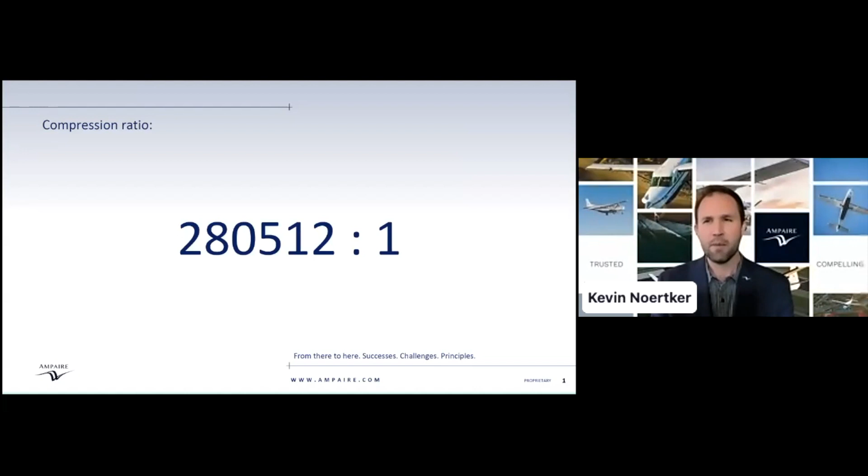What I hope to share today is a bit of that history, some of the stories, some of the lessons learned, as well as the principles that have guided us from where we began to where we are today, and certainly which I plan on driving us as we head off over the horizon into the future together. But before jumping in, I'd love to start with a video. As we saw, that compression ratio of 280,512 to 1 — this is just one moment experienced within the Ampaire team across those 8 years, which I'd love to share with you here. So if we could get the video started, thanks.

We're here at the Camarillo Airport witnessing our first hybrid electric flight on Ampaire's Eco Caravan. It's our first commercial intent product, slated for certification in 2024. The Eco Caravan is the first commercial application of this operating system for electric aviation that Ampaire is building, one that we intend to take into larger planes with higher capacity, longer range and endurance and payload. A very exciting future, the foundation of which we're beginning today. A significant fuel reduction, 50 to 70% in terms of fuel and maintenance combined. That is transformational for any airline, for any operation.

Clear to 1, Camarillo Tower, runway 26, cleared for takeoff. 1, clear for takeoff, runway 26 left.

Number 2, following traffic, short final, runway 26, clear to land. Clear to land, runway.

A hybrid electric aircraft is actually going to be able to fly people and cargo. Just landed, had a successful first flight. Yeah, the team's worked so hard, and this is such a magical day for all of us.

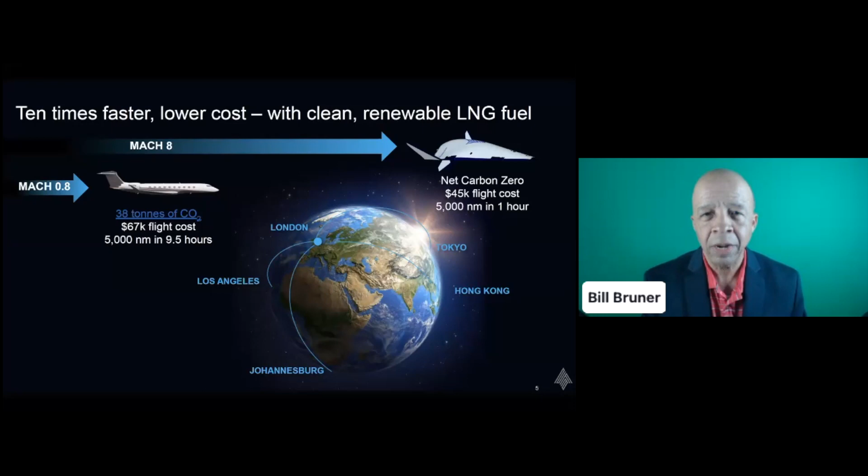3D printed aircraft production costs will be similarly low, and our fuel costs, even when renewably sourced, will be pennies on the dollar compared to fossil Jet A. All this combines to create a product that's 10 times faster at the same or lower operating costs than today.

We've raised $200,000 from our friends at Kepler Space Ventures and a couple of angels. We've won $2.5 million in awards from DoD and NASA to build the engine. We've executed a $25,000 contract with Lockheed Martin Space Systems to validate our 3D printed aircraft concept, and we've received $133,000 in non-dilutive grants from the New York State Energy R&D Authority through the Venture for Climate Tech Accelerator. Plus, we have letters of intent from companies that wish to use our aircraft for their missions and others who want to buy our engine. So we're moving.

So I'm the CEO. I was a presidentially appointed senior manager at NASA, fellow in the Office of the Speaker of the U.S. House of Representatives. I went to the Air Force's Top Gun School, the Fighter Weapons School, was a supersonic aviator for the Air Force. So I can't wait to go faster than supersonic to hypersonics.

David Gregory's our COO. He printed the first 3D printed regeneratively cooled rocket engine. He developed America's first oxidizer-rich stage combustion engine. He was the lead propulsion engineer on the BE-3 rocket engine that launches people into space on the New Shepard vertical takeoff and vertical landing rocket. So he has the distinction of building the engine that was the first ever to launch people on a VTOL rocket vehicle, so eminently qualified.

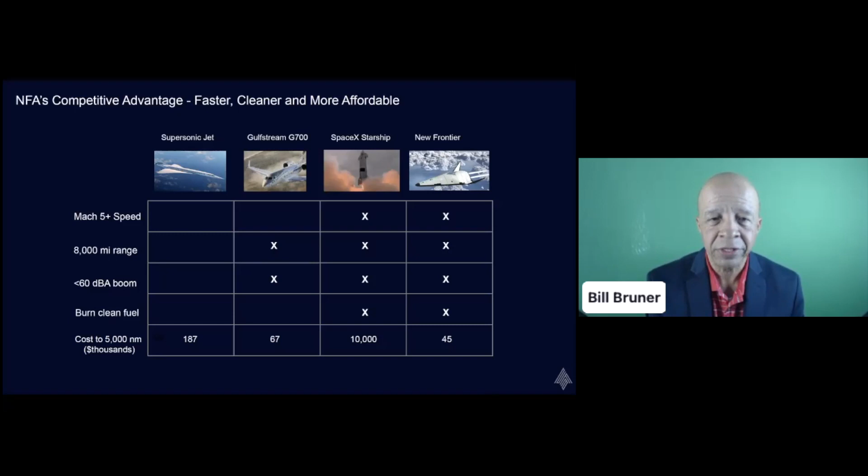So we're bragging on ourselves. SpaceX can go as fast. They use methane fuel, and they could make it renewable just like us. However, that vehicle is going to cost more than we cost to fly. It's the size of a skyscraper, and it's going to require a lot of infrastructure at both ends to do the point-to-point mission.

So how do you make money? You print vehicles and you sell them for more than it costs you to make them. A Gulfstream costs $100 million at that price, with a $50 million per airplane cost of goods sold. That's a 50% margin.

The charter airplane market, this bizjet market, is about $60 billion, and we see ourselves at $1 billion in revenue 9 years after our first flight. That's enabled by low production costs and 3D printing. And we see that this is going to be huge, and that doesn't include military.

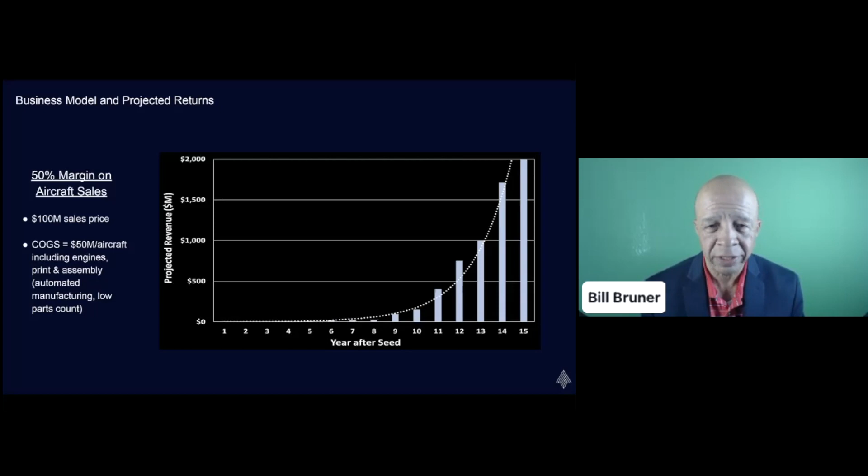That's simply commercial jet sales. So our go-to-market plan is to start selling the engine now as a product to NASA and small space companies. We are also currently selling the first version of the aircraft, the Pathfinder, into the DoD sales channel, where we have an extensive Rolodex. We've begun customer discovery conversations with large air express cargo companies and charter operators, and we have an LOI from a major hospital system to carry medical logistics when the aircraft is ready.

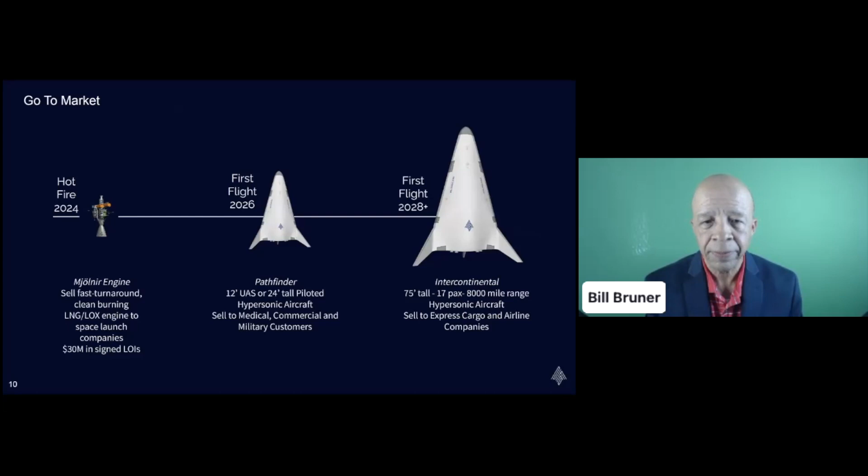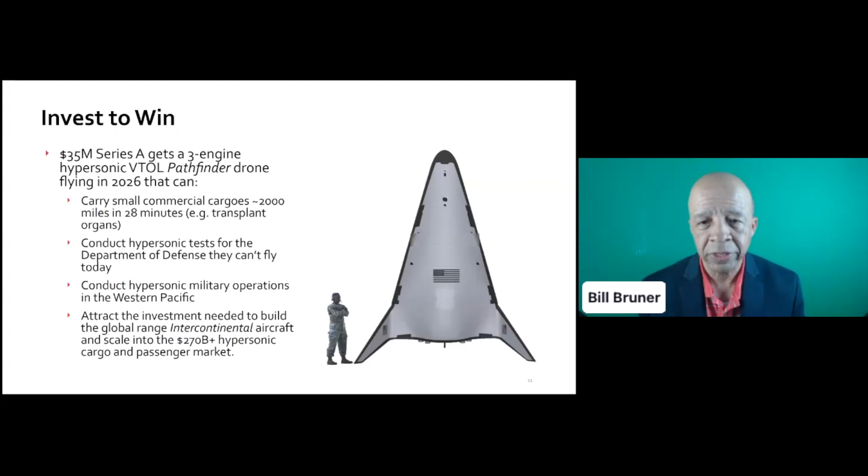So last slide, this is our call to action: invest to win. $5 million to get the engine tested and ready for sale as a product. A further $30 million to print the 3-engine version of the airplane. That gets us to hypersonic VTOL flight and MVP. This airplane would not just be a proof of concept, it would be a revenue earner, flying cargo for military and civilian customers, conducting affordable routine hypersonic tests that our country hasn't been able to do since the X-15 flew in the 50s and 60s.

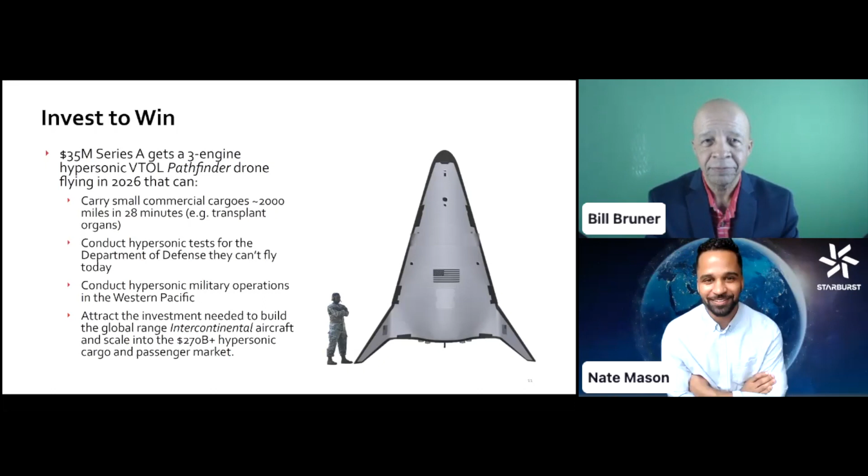Avol Aerospace focuses on same-day drone delivery of bulky items. Led by Nate Poon, Avol builds novel, dual-use autonomous electric drones enabling delivery to hard-to-access rural areas. Their solution has use cases in logistics, aerospace, medical, deep tech, and climate domains.

Hey everyone, my name is Nate. I'm one of the founders of Avol. Our goal is to enable faster, more affordable flights anywhere in the world using autonomous electric aircraft.

Before I get started, a brief snapshot on who we are. We have 9 pilots with different hospitals across the US to deliver medical supplies. We're 2 PhDs out of Berkeley and Cambridge. Both of us have started at least 3 companies and exited at least one of them. The aircraft that we're building has significantly lower manufacturing costs, and we make about 72% gross margin for every delivery we make. We raised just under $750,000 last year from investors, plus a series of government grants with the DOE and the DoD.

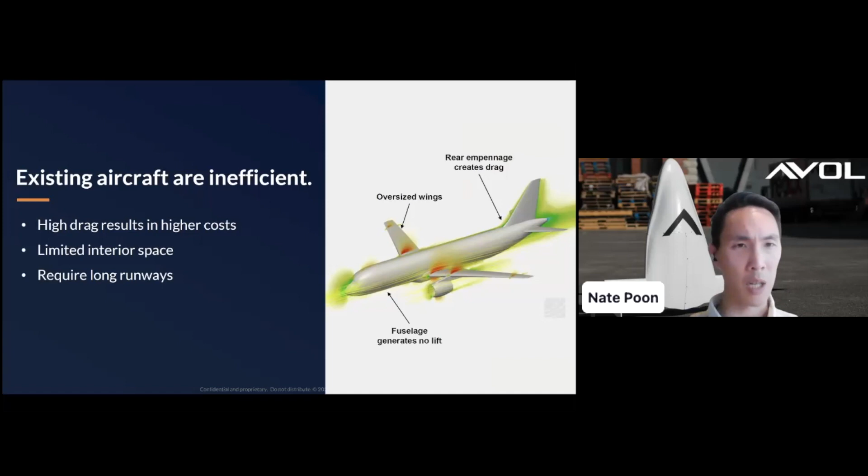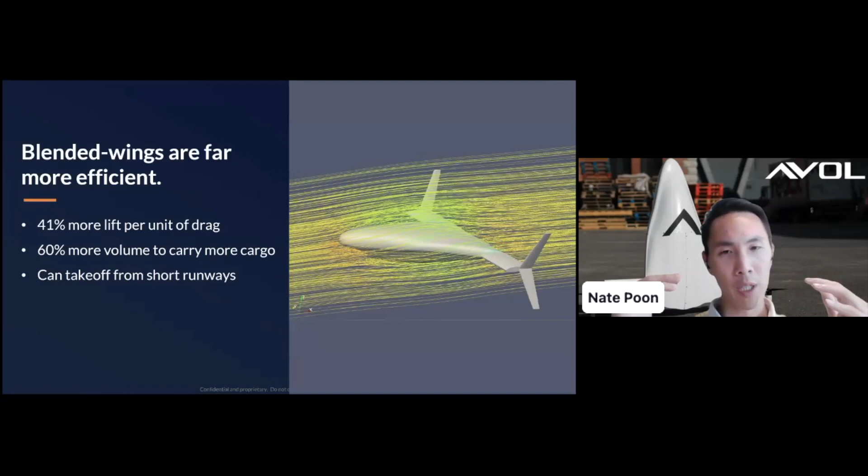So one way to make a much more efficient aircraft is to do something called a blended wing. Blended wings are significantly more efficient. Instead of being a tube with a couple of wings on it, these aircraft, the entire aircraft is a wing. So you get much more lift per unit of drag, which means you're more aerodynamically efficient, you have more range. We have more cargo volume capacity to carry more cargo, which improves the unit economics of whatever you're carrying in the cargo bay. And then because the aircraft is so efficient at generating lift, you can operate from very short runways.

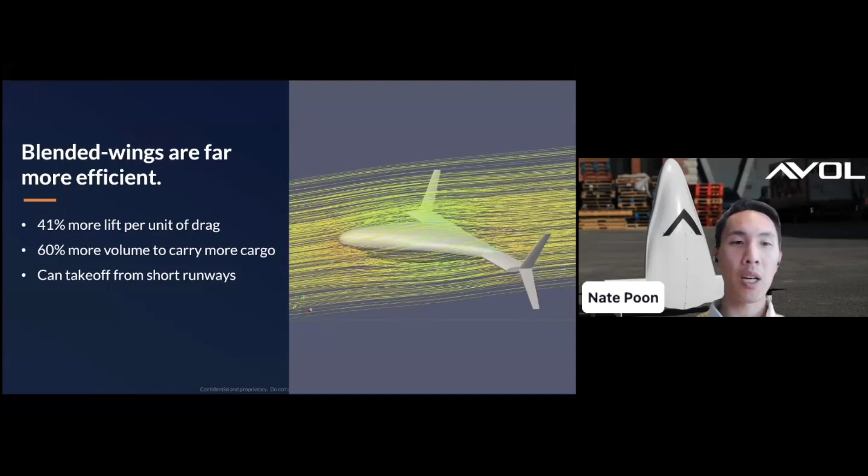So there's been a couple of attempts to do this, but the challenge is extremely large aircraft like this are extremely difficult to build. To give you an example, Natilus, JetZero are also building very similar blended wing aircraft at a much larger scale. They've taken 8 years, 6 years to do this, and still no real large scale prototypes. So these types of aircraft are very difficult to build.

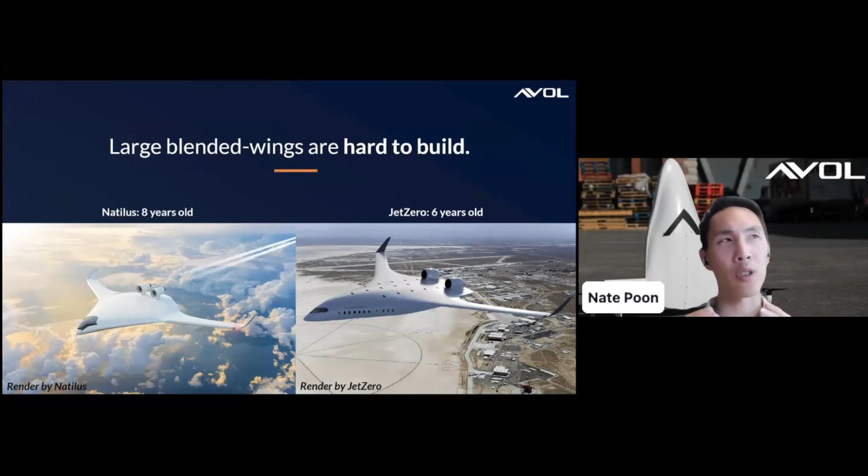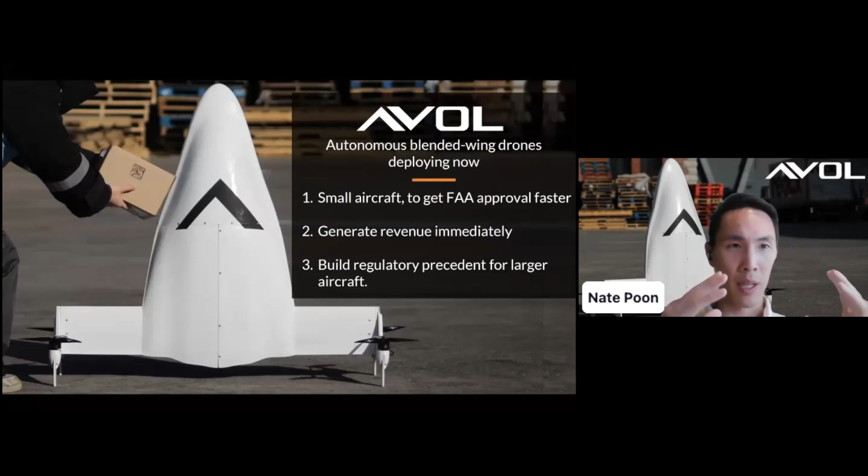And so the thesis behind Avol is to build small, autonomous blended wing drones that can deploy immediately. When you build small blended wing aircraft, you can get FAA approval faster. You can start generating revenue immediately within a standard VC timeline of about 5 to 6 years. We could get you about $100 million in revenue. And you can build a regulatory precedent for building larger aircraft based on that airframe. So that's the general thesis behind why we started Avol.

So the problem we dialed in on was delivering things between hospitals. Right now, medical deliveries between hospitals are extremely slow. About 1/3 of transplantable kidneys are lost because transit between hospitals just takes too long. Each kidney has a value of about $2.5 million. So at about 12,000 kidneys every year, that's about a $30 billion problem just because we haven't figured out how to deliver kidneys between hospitals quickly.

You can extrapolate that to anything that enters and leaves a hospital - blood, organs, biopsies, vaccines, pharmaceuticals, which comprise about 44 million deliveries every year. So we believe that this is a pretty compelling problem that small lightweight drones are particularly useful for solving.

The challenge hospitals face is that their only options right now are medical couriers. Medical couriers are ground-based drivers. They take about 4 hours to arrive to pick up your payload, and then they transit for about 2 to 4 hours, which means that it takes roughly about 8 hours for a medical courier to complete what should be about a 2-hour drive.

So at this point, a lot of people go, well, we could just use drones, right? The challenge is that existing drones typically start with an airframe and then try to adapt that to a hospital. And I spent 10 years doing hospital logistics. This approach doesn't work because hospitals are some of the most risk-averse, custom-tailored customers that exist on the planet. And we see this in stalled efforts with drone companies engaging with hospitals.

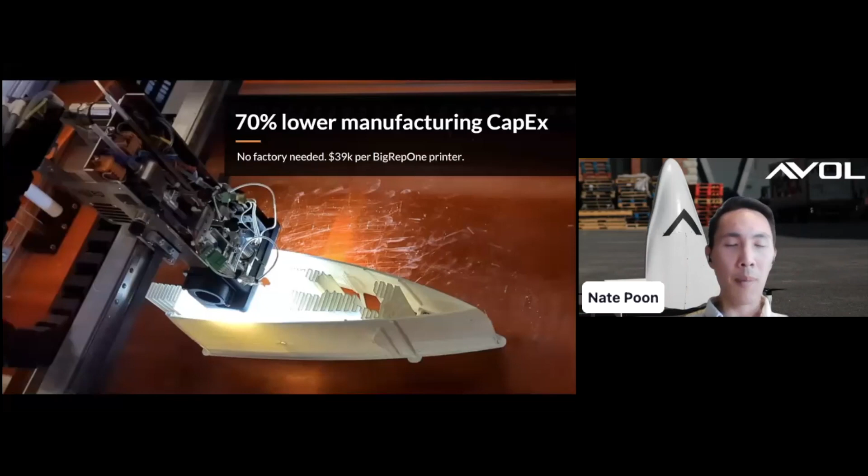The aircraft is 3D printed, which means that to scale up production, we don't need a factory. We can get a small warehouse, put a couple of 3D printers in there, and be printing roughly between 150 to 200 aircraft per year.

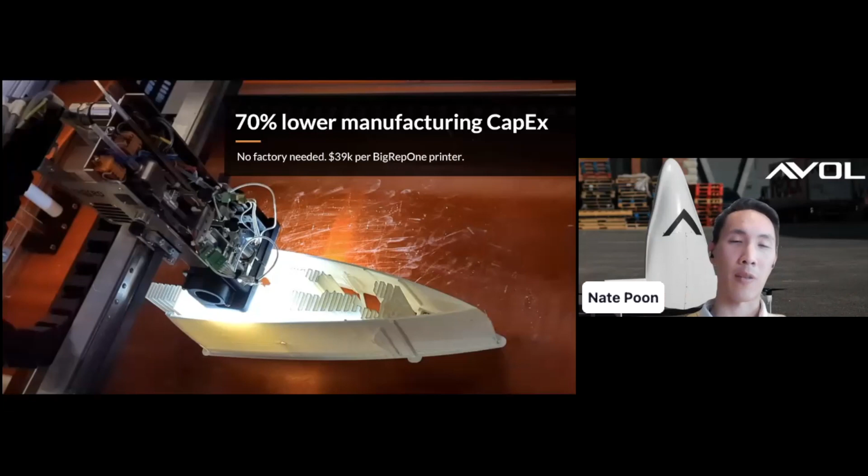What makes the unit economics work here is that we own the entire delivery process. We actually have human drivers pick up and deliver the kidneys, and the drone flight occurs in the middle of that. The driver picks it up, we have a drone flight, and then the driver delivers it on the other side. We do take a hit on the margins, but we're still able to generate about a 72% margin per delivery, while being able to target 3 to 4 times more customers than drone companies trying to fly in urban areas.

Regulation to fly over urban areas is not very well developed. By using drivers, we're able to take the kidneys and blood out of the urban area and fly from a more rural area, which opens up our market by a factor of 3 to 4.

It also gives us a unique go-to-market strategy, where we can enter a new city and just use drivers to deliver blood and kidneys initially, then bring in the drones as we achieve regulatory approval. Using this approach, we can enter a new city about 12 times faster than a drone company because we don't have to get FAA approval. This lets us scale across the United States, build a network of customers that love and use us, and then bring in the drones to increase our margins by up to 70% for our initial go-to-market strategy.

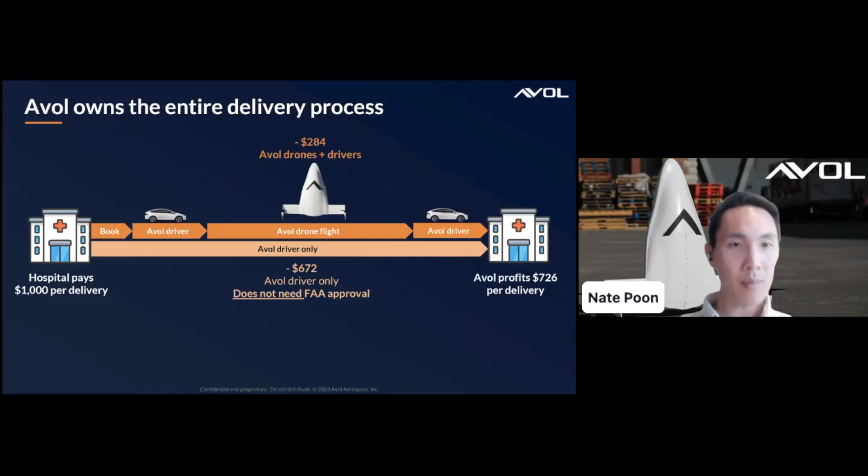The aircraft we operate is small. Typically it might take 5 to 7 years to get type and production certification with a larger aircraft. Because we have a small blended wing aircraft, we can take advantage of the Part 107 waiver, which gets us to mainstream operation in about 3 years. The caveat is we have to stay under 55 pounds, fly lower than 400 feet, and fly over empty areas. This is the use case we've optimized the aircraft for hospitals, and it resonates extremely strongly, especially with hospitals in rural areas.

Our model is straightforward: we charge a delivery fee for every delivery. There are about 44 million medical deliveries that occur annually. We can charge anywhere between $500 to $1,500 per delivery, resulting in roughly $2.3 billion in revenue if we penetrate 10% of the market. That 10% figure is driven by what one of our competitors, Airspace, currently achieves, with 1 in 10 hospitals using Airspace. We believe we could achieve about the same volume.

In about 5 to 6 years, our trajectory is about $100 million in revenue after we raise this current round.

Ultimately, the goal here is to use Avol to deliver anything, anywhere. Whether it's a small package or a large package, different aircraft have different niches, as Kevin was alluding to earlier. Our goal is to build a fleet of blended wing aircraft that caters to every niche of this market. We estimate the global air transport market is about $700 billion, and we think we could probably capture maybe 20% of that by building larger aircraft based on our blended wings. However, we're going to start with hospitals because I've spent a lot of time selling into this market, and we can generate revenue very quickly with small, easy-to-certify aircraft.

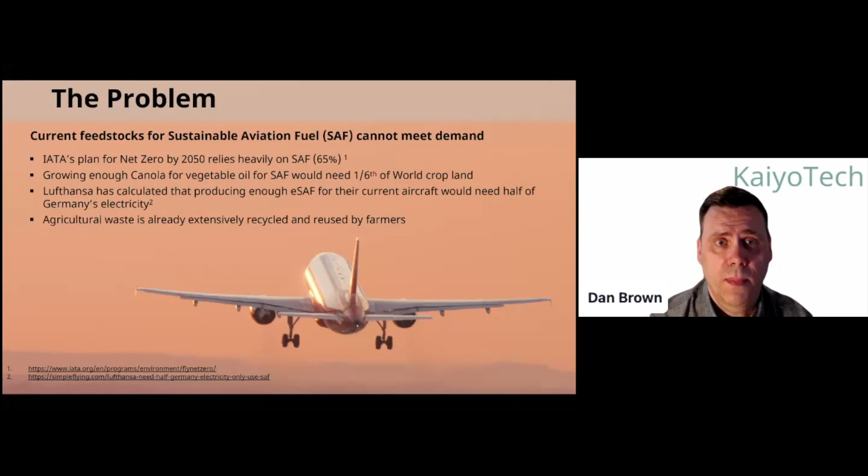The solution we're looking at implementing is algae, marine algae, growing them in the sea, which is their natural environment. So we're not using any land, we're not using any farmland, we're not using any fresh water, not using anyone else's electricity. It's just a different way of looking at the problem.

We know that in the past there's been a lot of experience and a lot of money spent on biofuels from algae. In the last decade, that was all genetic engineering, where we were genetically engineering marine algae to grow in a pond on land. What we're doing is mechanical engineering to engineer an environment in the sea which best suits algae. Next slide, please.

Just as a point, the reason for algae is the productivity. You can get more biofuel out of an acre of algae each week than you do out of an acre of canola oil in a year. And we will do that week in, week out, so we don't make all of our fuel in 2 months and then have to store it for the rest of the year as we use it.

The concept is to have enclosures under the water where we keep our algae under sunlight in natural seawater. Then we have a circular system by which we grow the algae, process them to take out all the hydrocarbons and carbohydrates that we can use to make ethanol. Everything else, the byproducts, which normally would be counted as waste, are our nutrients. They contain all the nitrogen and phosphorus we need to grow the next generation.

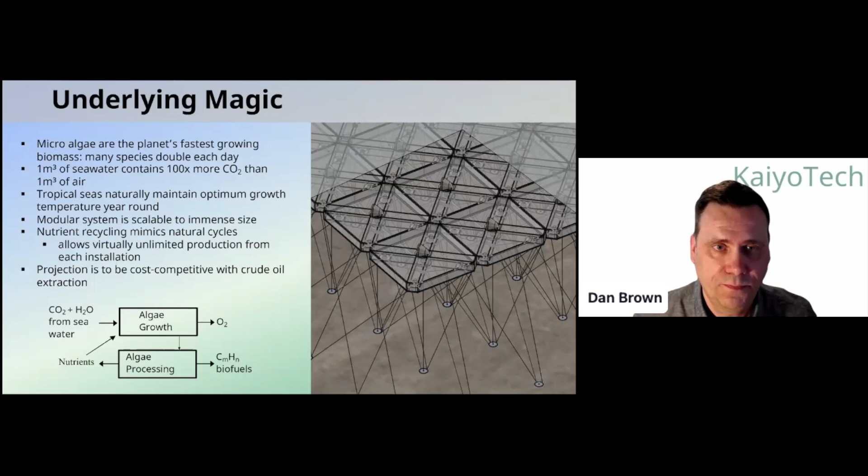The competitive advantage we're looking to do is we're first in the industry. No one else is really doing this. There are lots of people trying to grow algae on the land, and lots of people trying to grow large seaweed in the sea, one or two that, but no one's really doing what we're doing. So we're going to be there first. We've already got the patents lined up to make this work. And through what we're doing, we will find the best strains of algae, which we can then safeguard. And as we're going to be ahead of the curve, first in there, we will be ahead of the curve.

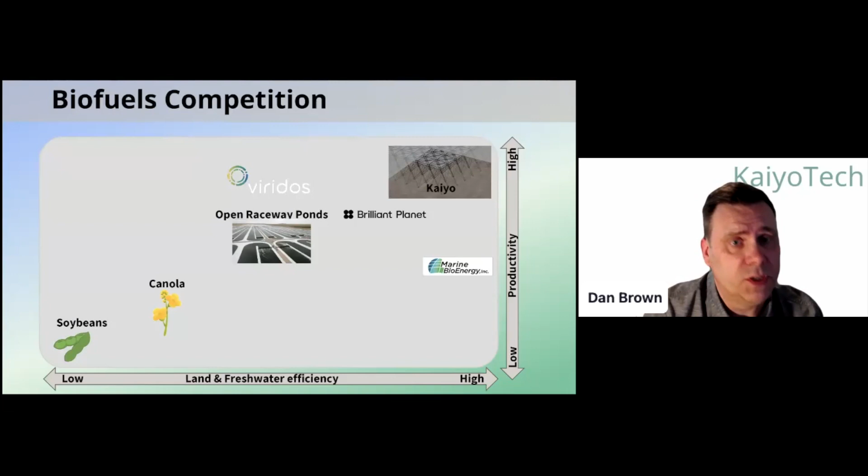So I've said a little bit already about how we compare. Microalgae are grown much, much faster than anything else, including any land-based crop. The problem with most of the approaches being taken is they use open raceway ponds, which still take up quite a lot of land and still need a lot of water. Our idea is to get rid of those major impediments, and also grow algae where Mother Nature has tuned them for hundreds of millions of years to grow in their ideal conditions. So we're meeting Mother Nature halfway, and we'll be more productive, with less competition and fewer resources required as a result.

The team at the moment is basically me. My experience is I've led teams of engineers in the aerospace industry, over 100 engineers, and I need to grow that team, and that's one of the things I'm looking to get funding to help me do.

Our go-to-market strategy: because we are producing basically raw bioproducts, one of the first major markets is actually not aviation or anything else, it's vegetable oil. In the same way that one of the main ways of making SAF is taking used vegetable oil and converting it into SAF, what we're effectively making is vegetable oil, which retails at more than two or three times as much per gallon as crude oil does. So that's where we would start. And as we learn to do this better and better, as our costs come down, we can grow into sustainable aviation fuel, and then ultimately, when we get the costs really down, it completely opens up to be a direct replacement for crude oil.

We still need to prove out the concept to people, so we're looking to spend as little money as possible with a three-phase stage to get to where we ultimately have rig one operating in the sea, generating about $8 million in revenue, covering its costs, and showing the world that the technology works and setting up partnerships with us. What we're doing now is lab testing, CAD work, engineering work, moving into field testing. Once we've reached our milestones for the first stage, and then on into getting rig one, that's around a total of 20 million investment for all of that.

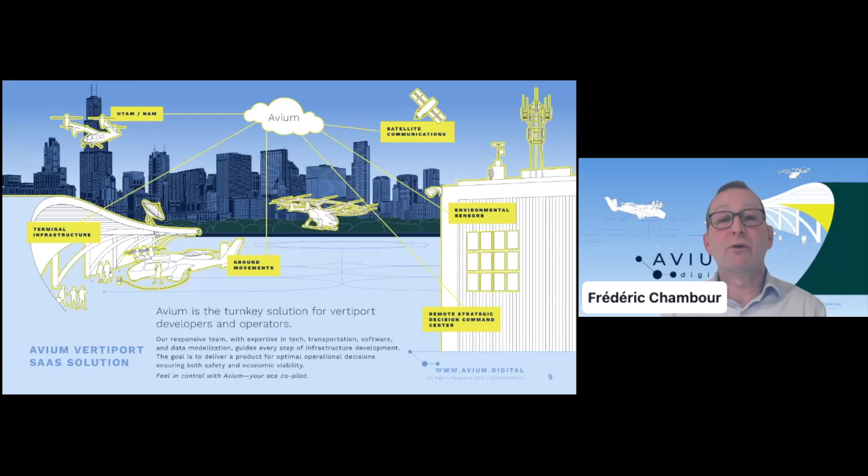Next slide. VTOL aircraft operators pay for their assets and infrastructure usage at vertiports. The vertiport owner pays a license fee to us for the use of our services. The license has a cap on the total annual number of flights so that we can benefit from growth, and the overage is paid on a pay-per-flight model. Avium services are value-based pricing. We aim at shifting the customer from seeing software as it is today for airports - a cost burden - to seeing our technology as an investment that contributes to their success.

Next slide. So we have analyzed the market beyond social media noise and marketing activities, and we anticipate that in Q4 2024, the Middle East region, mainly Dubai and Riyadh, will have the first vertiport operation, followed immediately by the United States in Q1 2025.

This will be followed closely by major European cities, just a couple. We also believe that the adoption rate will be significantly faster in the North American continent than in Europe, particularly the expansion across smaller cities.

For over a year, we've been exchanging with our future customers. Our current software version reflects those discussions and regular iterations with them, our team of experts, and our advisors.

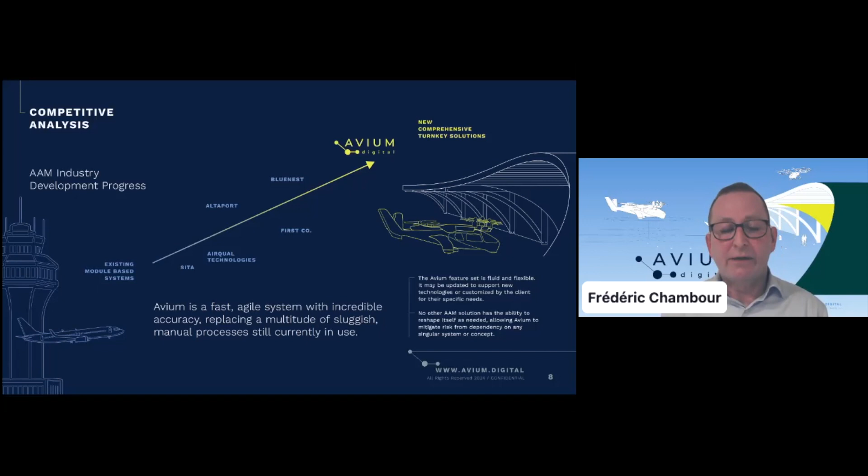As you can probably hear by my accent, our team speaks English, French, and German, and we have international experience in air transportation, operations, and management at CEO and COO levels. Matt has extensive experience in sustainable finance, and through our universities we have access to great connections and great research. Next slide.

Our financial projection: KPMG says that by 2030 the industry will be valued at 30 billion. They're not the highest, not the smallest, among the five big firms that made those projections. Early stage revenue for us will come from a conservative 10% out of those 30 billion, integrating third-party aircraft and infrastructure, and slowly when we start in 2025 we'll see the first license revenue kicking in.

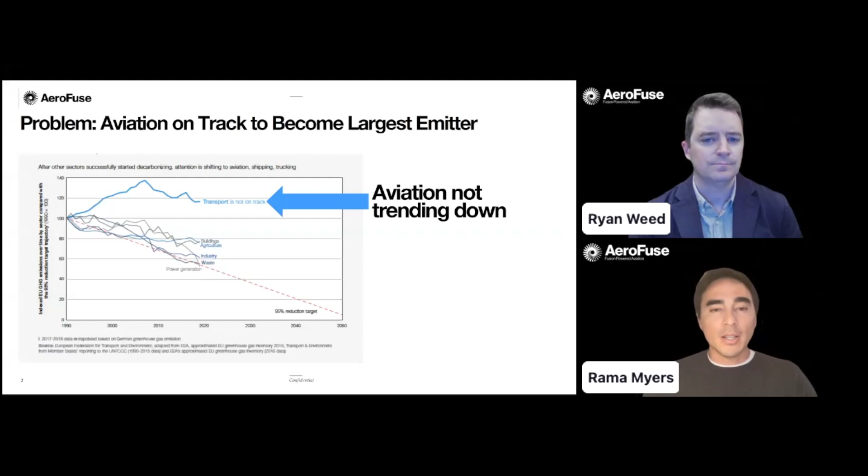A number of solutions are being developed. We've all heard of battery electric aircraft and hybrid aircraft like Ampaire. A number of folks are focusing on hydrogen propulsion via fuel cell or combustion.

But if we look at where emissions are coming from, it's medium haul and long haul aviation, which combined represent almost 75% of emissions. What's alarming is that if we look at the solutions available to us in that space through to 2050, we don't really have any other option other than SAF, or sustainable aviation fuels.

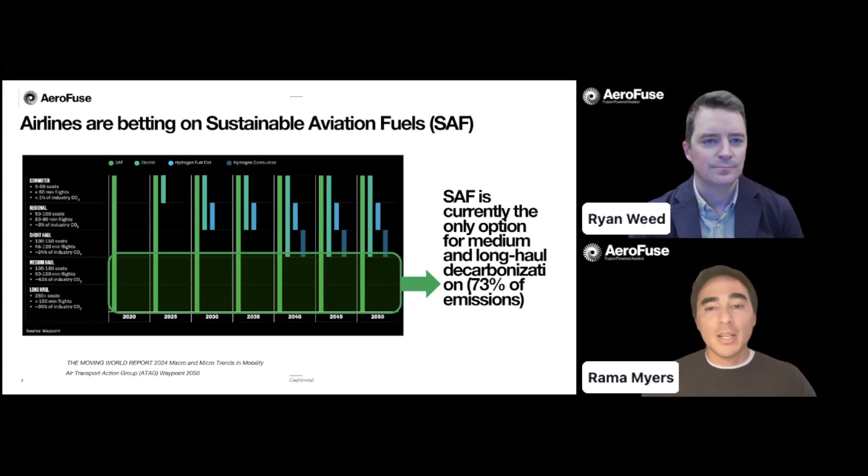SAF and all these solutions are going to be critical to the decarbonization effort, but the major issue with SAF is cost. Today, it's 2 to 8 times the price of jet fuel, and even out to 2050, it's forecasted to remain at 2 to 4 times the price of jet fuel. If we consider that airlines operate on very thin margins and that fuel represents up to a third of their operating costs, it's inevitable that increasing SAF adoption will lead to significant price increases for tickets.

In aggregate, this is a $4 to $5 trillion problem. This green premium will cost the industry about a decade of revenues, or put another way, it's $175 billion spent each and every year through to 2050 to absorb that green premium.

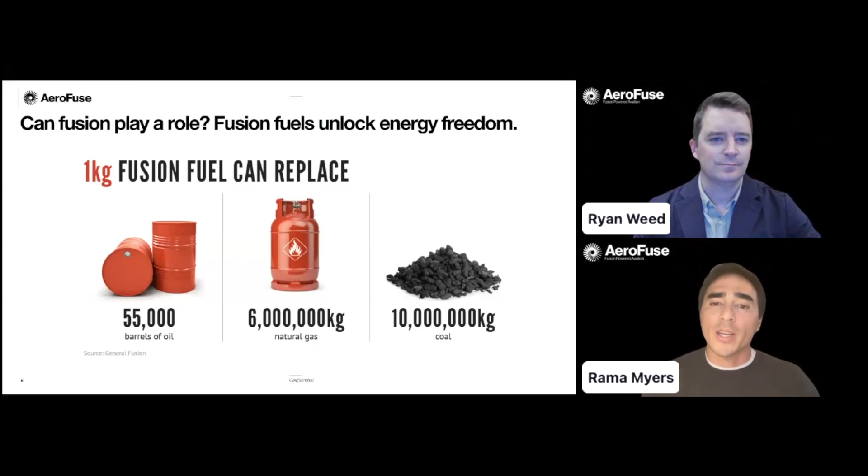This is why AeroFuse is focusing on fusion. What is fusion? Fusion is nature's power plant. It powers each and every star, including our sun. Fusion happens when you take 2 atoms and merge them together under high speeds, temperatures, and pressures. This creates energy, a lot of energy. Fusion fuels are millions of times more energy dense than fossil fuels, and we think we've got a way to unlock that for aviation.

Traditionally, people think about fusion in 2 ways. One is magnetic confinement systems, where you use large magnets to confine fusion plasmas. And the other is inertial confinement, where you use pulsed lasers to compress hydrogen isotopes to fuse together.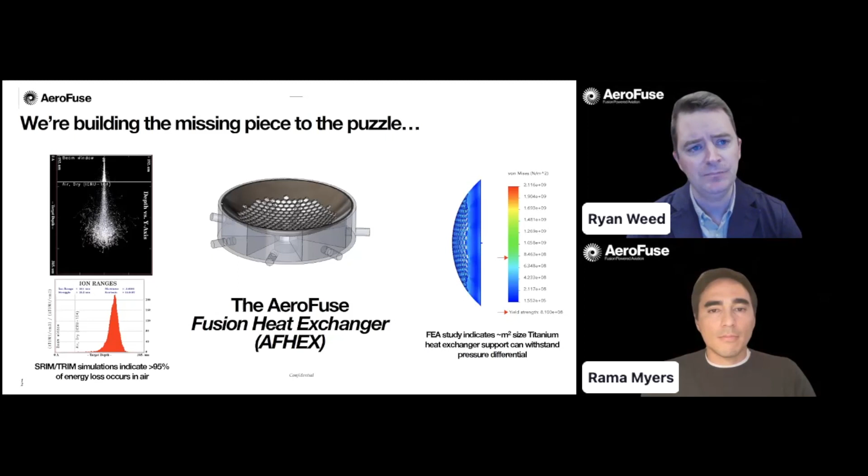So simply, our heat exchanger will be applied to third-party fusion core providers to come up with a complete solution that can integrate into the Brayton cycle, which is what the jet turbines in your 737, for example, operate on.

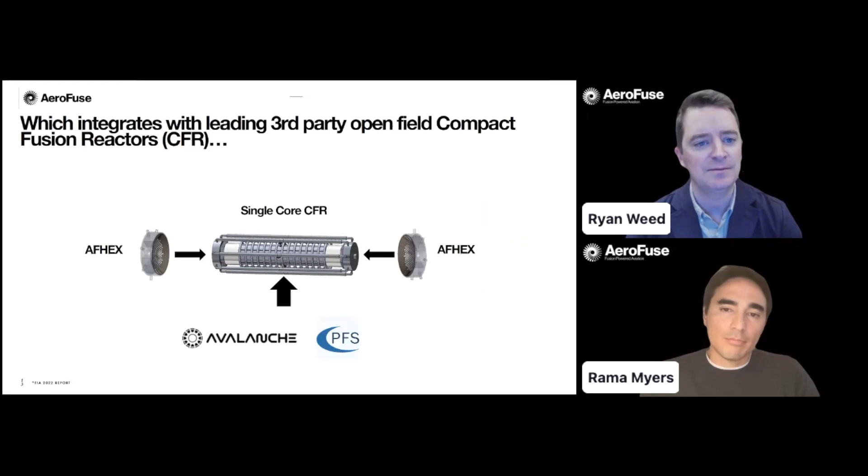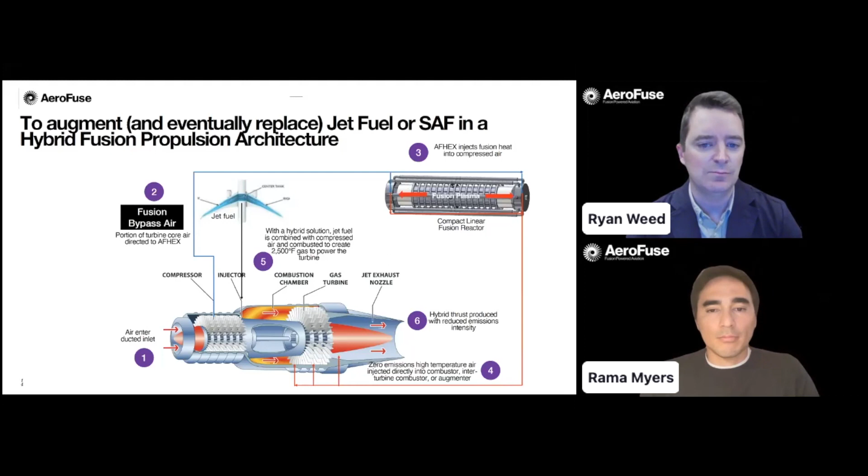Here's a diagram of how the system works. Essentially, we take a jet turbine, which is on the bottom, and take bypass air from the compressor stage. We route it towards our heat exchanger. It's then redirected back into the combustion chamber or turbine section, augmenting the fuel burn, and the heat, the enthalpy from the fusion plasma, can be introduced into this Brayton cycle.

For our Generation 1 solutions, we think we can reduce jet fuel burn by between 30 and 50% during cruise, which is significant given this will lead to reduction of CO2 per aircraft over a life of hundreds of thousands of tons.

We also have a retrofit-first strategy, meaning our technology will be compatible with aircraft rolling off the production line today that will be flying for the next 20 to 30 years. This also increases our TAM. As a fortunate byproduct of fusion's energy density, we'll also extend aircraft range and lower operating costs, or cost per available seat mile.

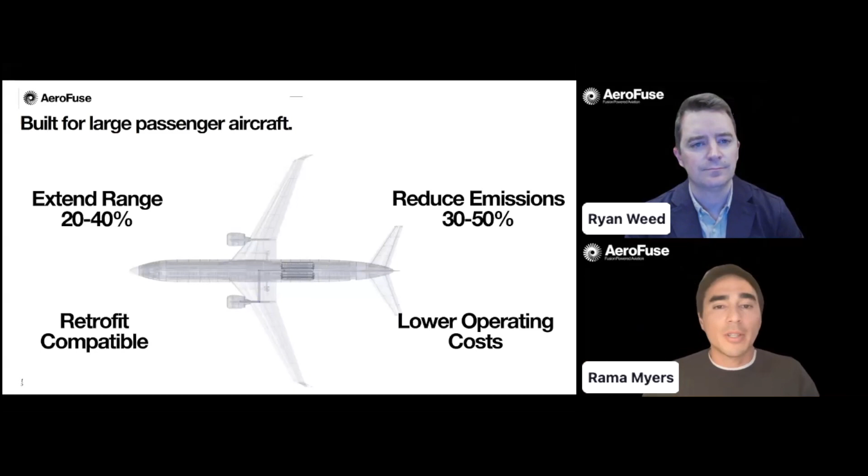Our target markets are commercial and military aviation, and we're going to start with military, given we can leverage the Air Force's certification pathway. Fusion-powered unmanned aircraft, such as collaborative combat drones or intelligence aircraft, will have the ability to stay airborne for weeks. We're also targeting fusion-powered tanker aircraft, such as the KC-46, with extended endurance and deployment offload capability. Transport aircraft, such as the C-17, will deploy troops and cargo to austere airfields without needing to refuel between mission legs.

On the commercial side, 40,000 narrow-body and wide-body aircraft will be delivered over the coming decades, and we want to eat away at jet fuel revenues, which today are $250 billion and are doubling to $500 billion over the next decade.

Our go-to-market strategy is to partner with airframe OEMs and engine OEMs to integrate, design, certify, and introduce this solution to airline customers.

So far, we've filed 4 provisional patents covering the heat exchanger as well as the integration into a jet turbine system. We have partnerships with leading compact fusion teams in the US, as well as a Phase 1 SBIR contract from the Air Force to look at integrating a fusion-powered propulsion system onto future tankers. We've simulated the heat exchanger and the engine cycle, and stood up a lab at UC Berkeley's Department of Nuclear Engineering.

The plan over the next decade or so is to first raise $1 million pre-seed to de-risk the underlying heat exchanger material solution. That'll happen at UC Berkeley, where we have a helium ion beam to simulate a fusion reactor, and we'll test the material in the relevant environment, followed by integrating it into a real commercial off-the-shelf microturbine to de-risk the fuel cycle. We'll then leverage military programs, as Rama said, unmanned drone systems, going forward into larger-scale demonstrations on sustainable aviation demonstrators like the X-66, followed by commercial pilot programs.

We have a group of advisors who fill in the gaps between regulatory, defense, nuclear advanced materials, as well as the commercial side.